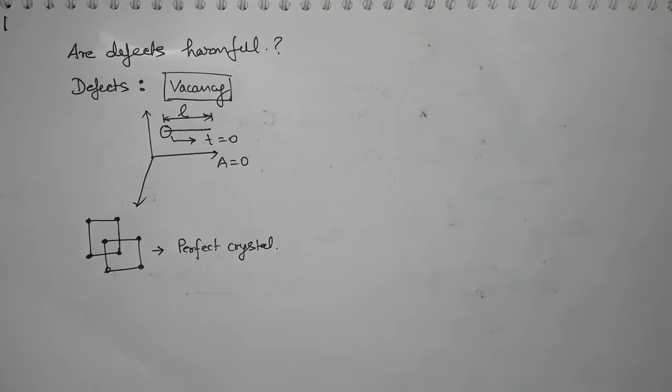So let's talk about vacancies. We know that vacancy is a defect, but it depends on our definition of defects. Our definition says that a crystal is perfect when all the sites where the atoms should be are taken by atoms. And when that happens, we call that a perfect crystal. But it is ironical, although all our understandings are based on such definitions, that a crystal is perfect when all atomic sites are taken by atoms.

But it doesn't happen in reality, never. We can never have a crystal system which has all the atoms on its sites. So we can never achieve any crystal which is perfect. Although according to the third law of thermodynamics, it should be available at absolute zero temperature, which also we cannot achieve. So maybe instead of calling something perfect, we could call it absolute, because absolute things don't exist in reality, they are unattainable.

So you can change your definition of perfect, and you can imagine that only when at least one of the atomic sites is absent of its atom is the crystal perfect. Then we will see almost all the crystalline materials in their perfect form, in their natural form. But it is just so that our definition of perfect does not match with what is naturally existing.

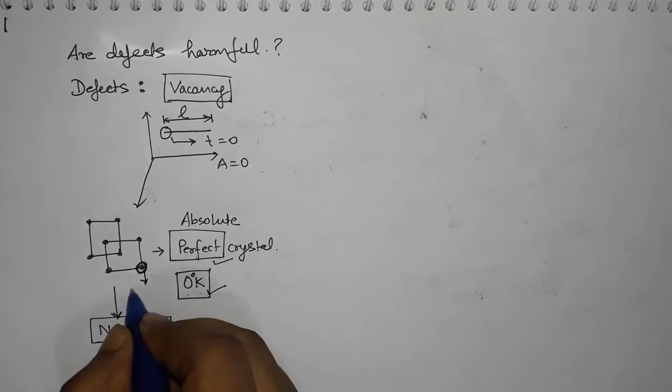So whatever we see in nature, we say that those things are not perfect, and that something absolute, something perfect, something heavenly can exist at some absolute temperature, pressure, scenario, or place. But by nature, it is important for a defect to be present, and therefore defect, although it sounds a negative term, sometimes provides a lot of the things that are there in the universe of materials. So we will talk about one particular type of defect today, and there is a reason why we need that.

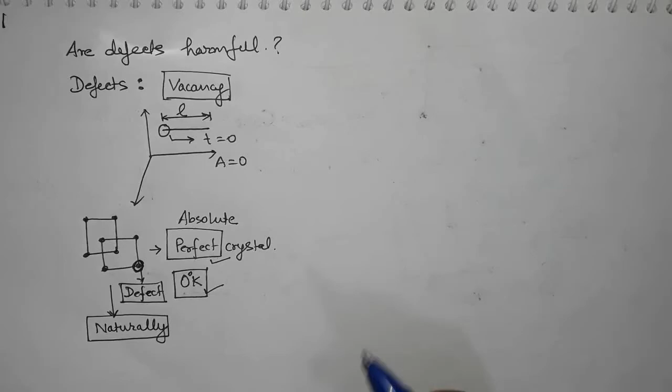So let us imagine that we have a perfect crystal and all the atomic sites have atoms sitting in their equilibrium position. Okay, so we have atoms like this, and then we have another atom layer, maybe like this. This appears to be a plane of atoms, and this interplanar distance we can call A, and the interatomic distance we can call B.

Okay, and now, if this is the situation that we don't have any defect and we are trying to deform this material, and this is my x direction, so this is x1, this is x2, and along this I'm trying to apply a stress, and this stress will vary because of the presence of atomic sites, right? And so let us say that our strength, which in this case we are calling cohesive stress or

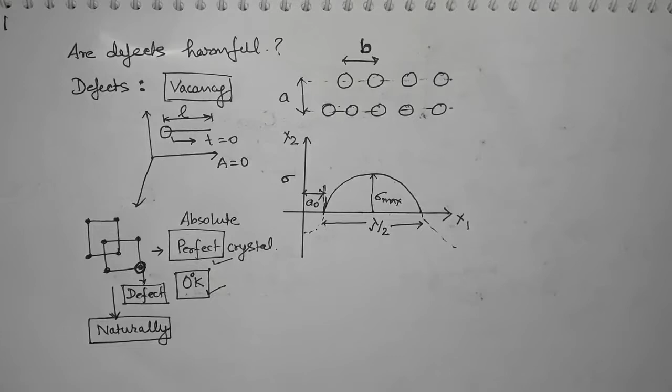Okay, and so we can say that our stress here follows a sine curve equation, which can be given by the amplitude multiplied by the sine of the angle, and that angle at any point can be given by 2 pi by lambda into x, right?

Because the whole wavelength covered in 2 pi will be lambda, so any unit distance will be 2 pi by lambda, and the unit dimension along x1 direction, so no displacement is happening in the x2 direction. That is our assumption, so we can just call it 2 pi x by lambda instead of calling it 2 pi x1 by lambda. So this is

how the stress changes. And if we imagine the angle to be very, very small, then we can take sine of theta equal to theta, so we can say sigma max 2 pi x by lambda, right? And now we can say that stress is actually following Hooke's law, because we are talking about elastic deformation. So this should be elastic modulus into strain, and strain in this case is actually x by A naught.

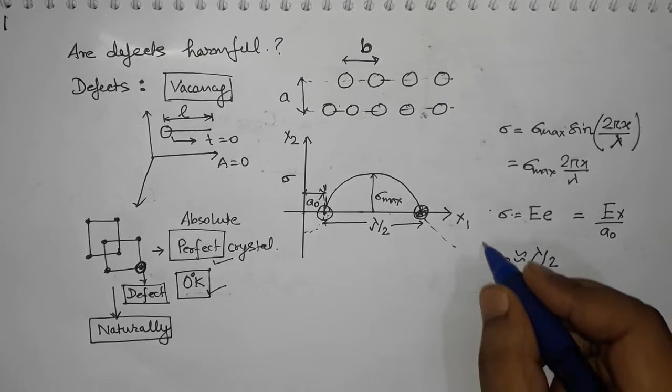So we can assume that A naught is equal to lambda by 2, and this is our assumption. And this assumption is not very wrong, because we are talking about dimensions of very short lengths. So we are not making much mistake here. So now we can replace A naught with lambda by 2, and then we can plug everything back in the original equation, and we can say that sigma

should be replaced by Ex by A naught is equal to sigma max and 2 pi x by lambda, and lambda is 2A naught, so we can replace lambda by 2A naught, right? So then A naught gets cancelled, x is cancelled. So what do we get? We get sigma max is equal to pi by E, right? So this is what we get.

And now, this is the maximum value the stress can attain if we want to deform the atoms elastically, and we imagine that it is a perfect crystal, there is no defect. So how much strength is required to have this much amount of strain? So this is the maximum value of stress it can go to.

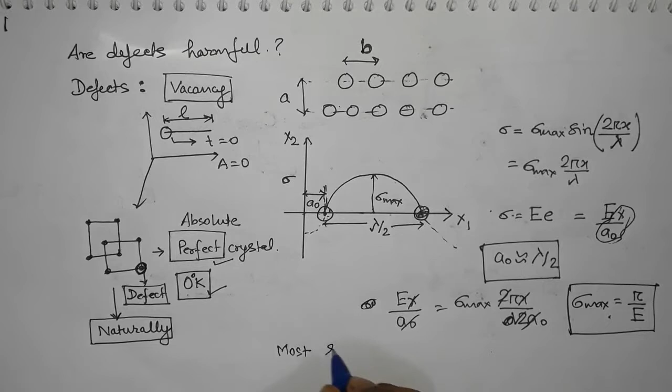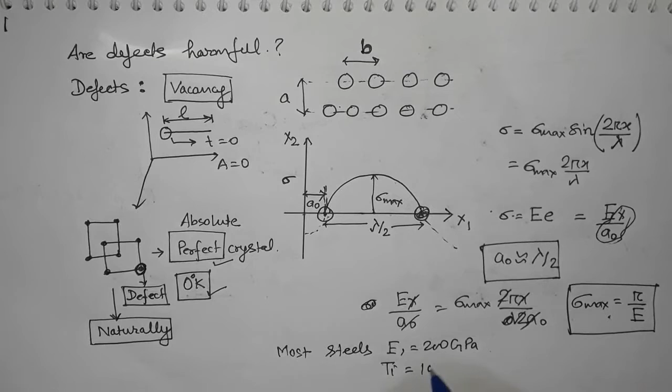And for most of the materials, especially let's say steel, the elastic modulus is in the range of 200 gigapascal. For titanium alloys, it is in the range of 100 gigapascal. For aluminum, it is close to 70 gigapascal. Okay, so there can be a change of 1 or 2, which will make it 201 gigapascal, 202, 205, sometimes 210. So in this range steel falls, in this range titanium, and in this range aluminum and their alloys.

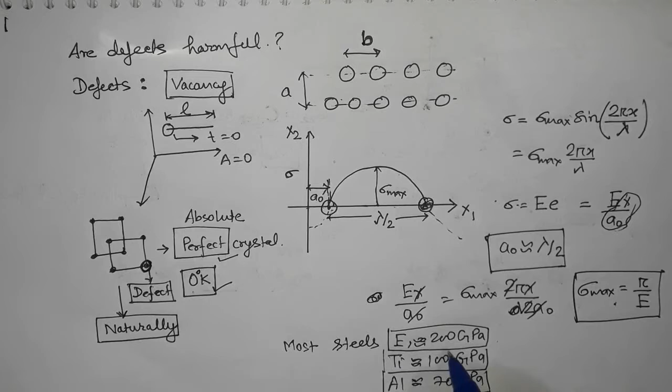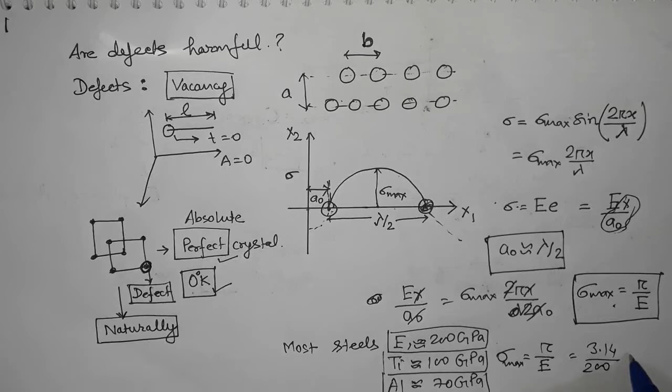So let us put 200, which is the highest. So if you put 200, then how much should be the strength you will be getting? So this will be 3.14 divided by 200 gigapascal, right? Oh, there is a mistake here, because dimensionally it is not correct. So sigma max should be E by pi. So this will be 200 by pi.

So this will be 200 by 3.14. And so let's take that to be 3. So how much should that be? It should be 66 point something, right? So 66 point something, 66.7. So we get 66.7

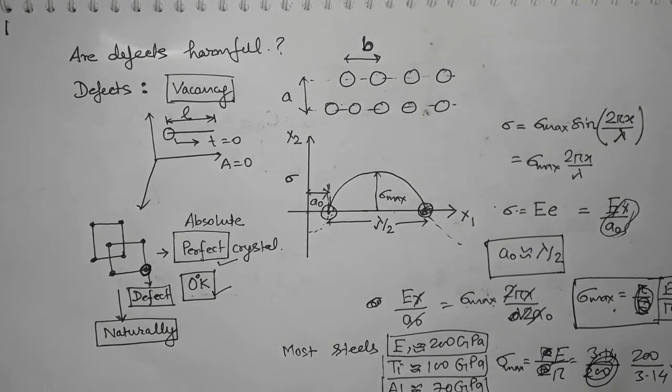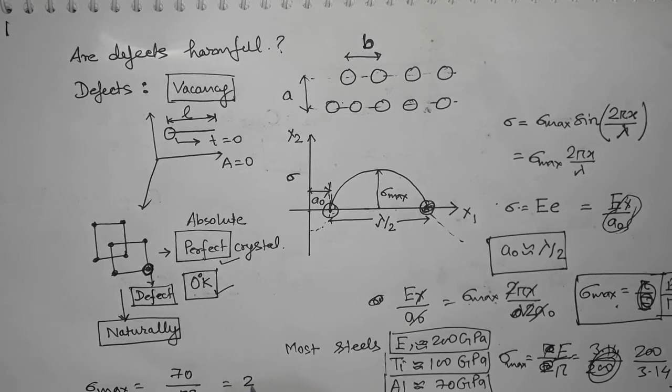gigapascals of strength. But maybe many of you know, or maybe not, this is a very high value. You don't actually need this much amount of stress to break steels. You need much lower than that. So if you take the very smallest value, 70 by pi, which we are rounding off to 3, will be 23.3 gigapascal, and this is also very high.

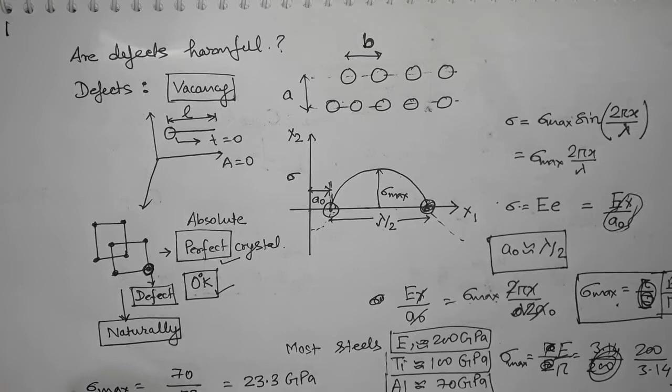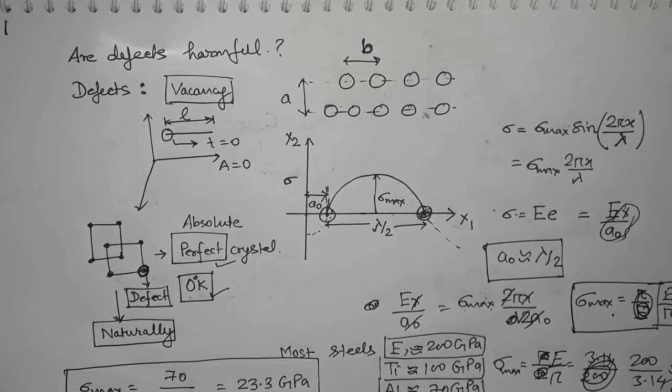So the question is, what is wrong? If we calculate the stress to be in gigapascals, we actually don't see any material even close to 1 gigapascal. The closest you can get is maraging steel. For maraging steel, you need a very high amount of stress, maybe close to 1 gigapascal to break it, but no other material can go to this much strength.

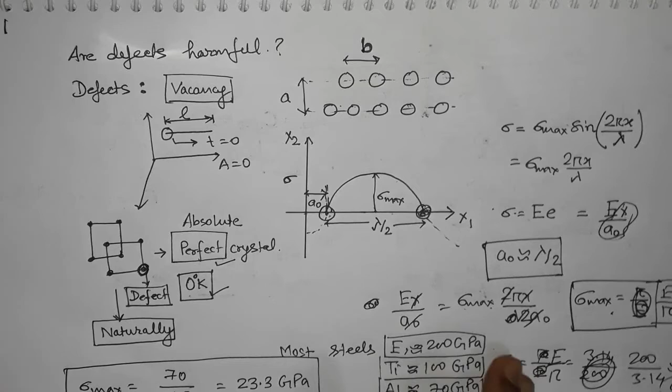So then what is wrong in our calculation? Forget about breaking. We are talking about deformation. And we need a much lower amount of stress in order to make deformation in steel. So what is wrong? And if there is something wrong here, then it is right to say that material is not deforming in this way. Okay, so let us discuss this in the next page.

So now we know that materials deform at a very low stress in comparison to what we calculated, which is called the theoretical strength of material, or the theoretical cohesive strength of material, and that comes out to be E by pi. Okay,

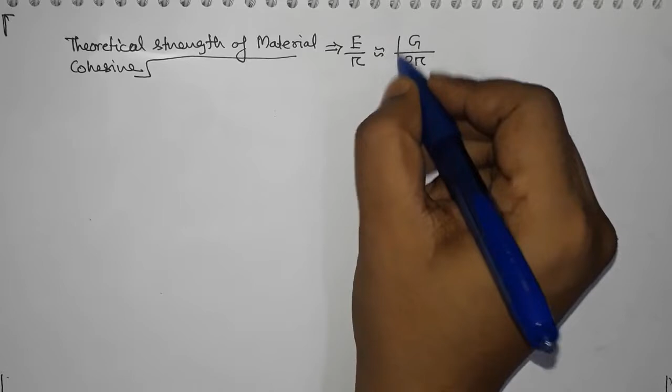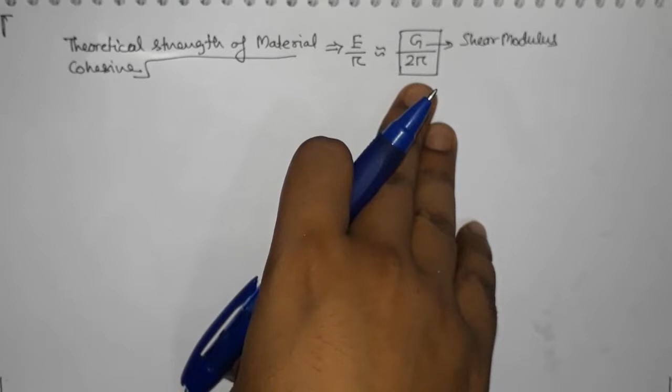so E you can relate to G by 2 into 1 plus mu, and mu is not very large, so you can just ignore it. So this could be G by 2 pi, where G is the shear modulus. Okay, so now we know that this is not true. We never attain this much amount of strength, so there is something wrong.

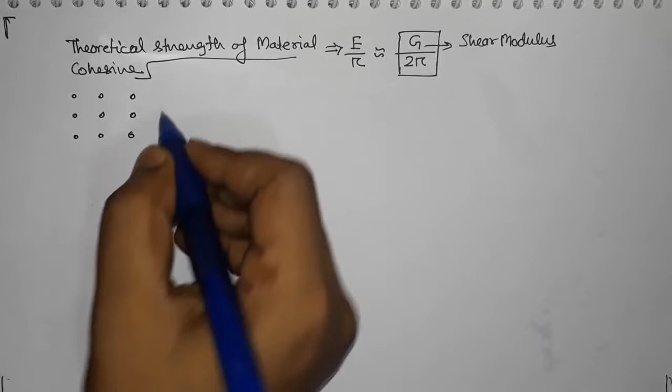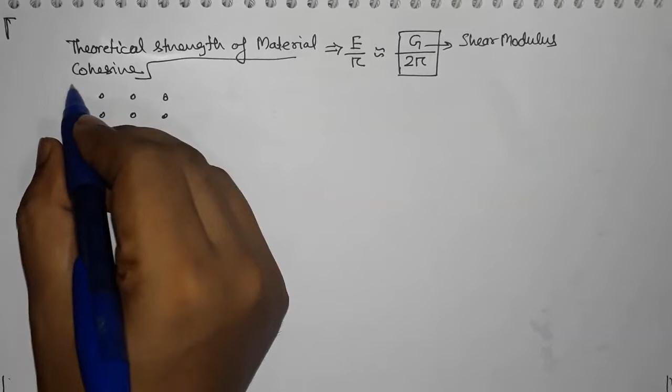The mistake we are making in this theory is that in order to have one atomic distance of deformation, so let's say that this is how our atoms are arranged. Okay, and we are applying a shear stress like this, and a shear stress of the same amount in that direction. Now you increase the shear stress in this direction, then it should deform. Or you fix this direction and just apply shear stress in this direction, then it should deform, right?

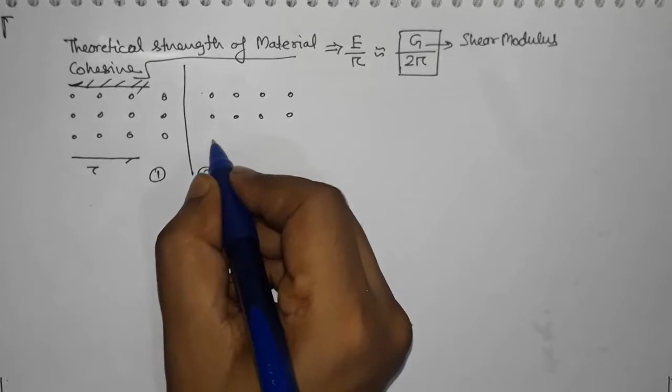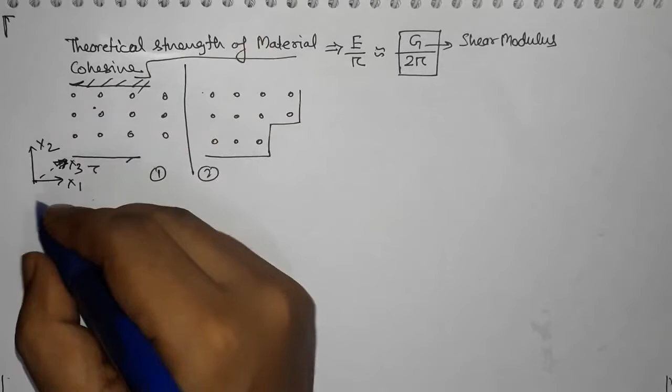And now we are saying with this theory that, so this is figure 1, and in figure 2 we are trying to say that the displacement or deformation which is happening in our material is of one atomic distance. So it's like this, and this is x1, this is x2, and then you have x3 direction like that. So you have atoms along x3 directions also. So you have something like this

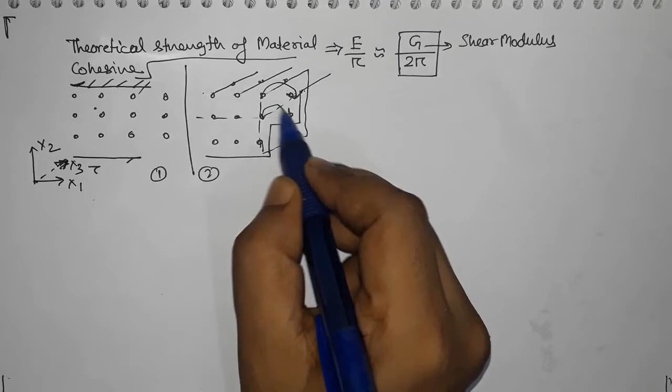in 3 dimension, and what we are saying here is that this whole plane of atoms along this line has moved in one instance. So if there are 100 atoms on this plane, all those 100 atoms have moved to this position. This atom has moved here, this atom in x3 direction has moved here, and so on. And this assumption is wrong because it requires a coordinated movement of atoms along the whole plane,

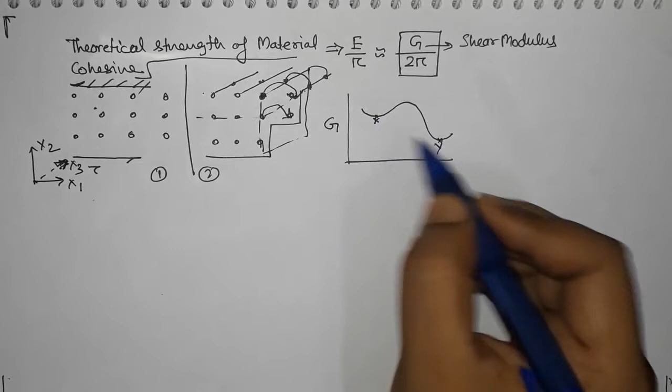and that requires a lot of energy, because the energy barrier for this atom to go there will be of some value. So let us say there is a stable position here and a stable position here, and this is the free energy. In order to go from site 1 to site 2, the atom requires some amount of energy, which is a barrier.

It will not just go there, because it will have to increase its energy and then go there, and this is called the energy barrier. This energy barrier for one atom is something, and for n number of atoms it will be multiplied by n, which is a huge amount, and because of that we get a very, very high value of stress required for this movement. So it appears that material is actually not deforming in one go, right?

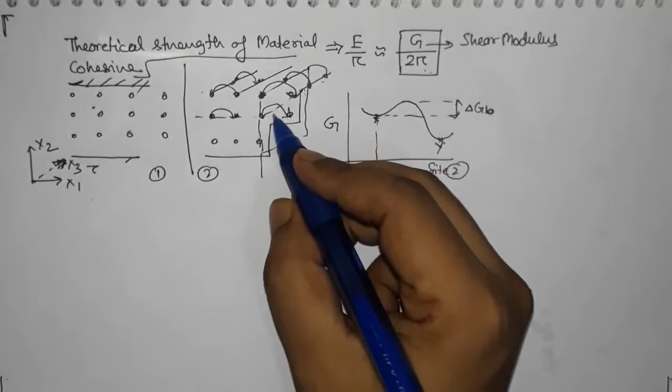Not only that, we are also saying that not only this atom has moved, but this one, and this one, and this one. So we are saying that the whole slab of material has displaced itself in coordination with millions of atoms in one go, and that's not happening. So then what is happening? The theory which describes the phenomena in reality is based on the concept of dislocations, and that's the kind of defect we are trying to understand in this lecture.

What is explained by the theory of dislocation is that we have a defect in our system, and it is just there by nature. This defect can be described as a plane where atoms are missing. Again, this is x1 direction, this is x2 direction, and the direction going into the plane is our x3 direction. So we have a whole plane in x3 direction, and this plane is missing, right? And then when you apply stress, this plane has joined this plane.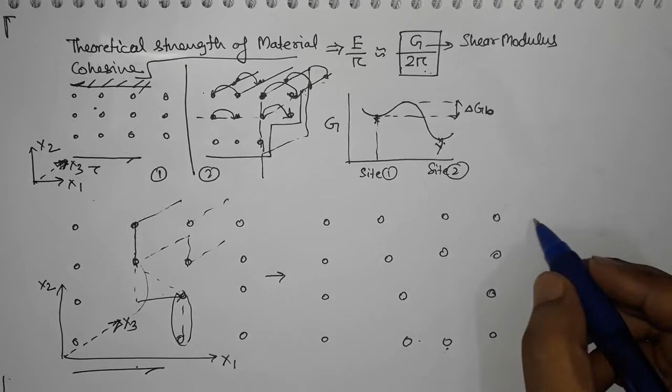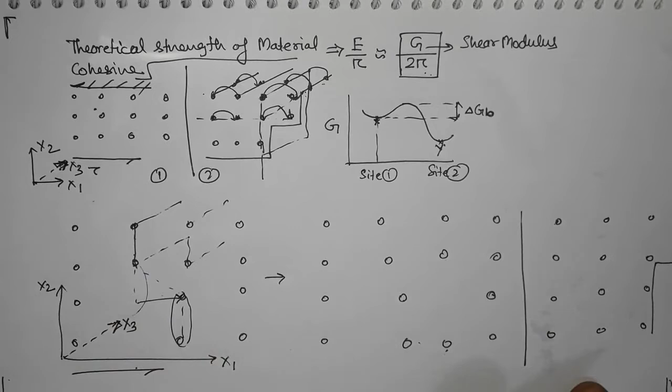So in the next step what will happen? This will happen. So now this will join this one, and so on the surface you will see a step. Okay, and this phenomenon of movement of such kind of dislocation, and many such steps together when you see, is called a slip band. Okay, many of these kind of steps together are called slip band.

So now let's pause for a while. What we learned in our last page was a mechanism of deformation in which atoms move piece by piece together, and instead of drawing those atoms, we can draw planes. So we can say this is the plane of atoms, and then there is a plane which is missing, and then there is a plane, and then there is a plane, like this. So this is how the material is, and the atoms are arranged at their interatomic distance.

Okay, so instead of drawing all the atoms, we can draw planes, and we can say that this plane is missing, right? This becomes a symbol of dislocation, this particular type of dislocation. So what is happening here is that this plane is joining this, and this part becomes the extra half plane. Then this extra half plane joins this one, and this one becomes extra half, and then at the end you see an extra half plane there which forms like a step.

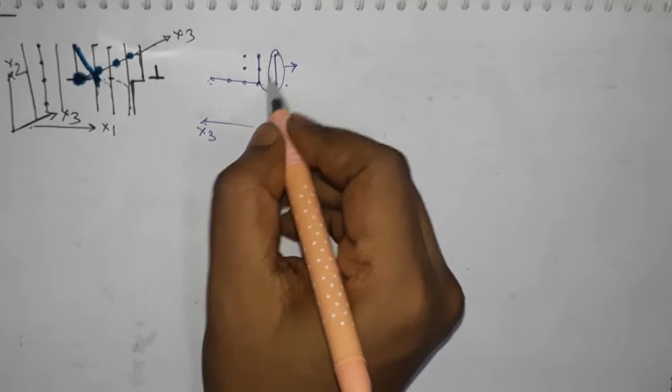Okay, so now let us try to see that. I hope I can make you understand by drawing this in a different way. Imagine that this is my half plane, with atoms along here, and this is my x3 direction now. When I say that this half plane will join this, so that this part becomes free, instead of all these four atoms joining this layer of atoms, it can happen in the next step.

Let me draw that part. It can happen that this half plane has joined that one, so I am making a little tilt here to present that, but in the next layer along the x3 direction, the half plane actually lies here. So let's denote that here my x3 coordinate value is 0, here it is 1, and here it is 2, and so on. So one atomic site has a unit of 1.

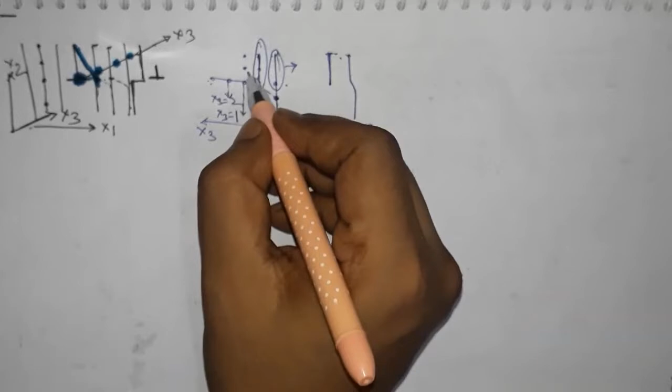What I'm saying here is that at x3 equal to 0, the half plane has moved. At x3 equal to 1, the half plane has not moved. At x3 equal to 2, also not moved; it has happened only on the first layer of atoms. Slowly it will happen to the second layer, then the third layer, then the fourth layer, and so on. And the same phenomenon on the x1 x2 plane is also happening piecewise. So it is a piecewise phenomenon.

Not more than one atom is required to move in one go, and therefore this phenomenon needs a much lesser amount of energy in comparison to the theoretical strength, and this explains why material can deform at a very low value of stress. So this phenomenon is called slipping.

And it is called slipping because it looks like one layer of atoms is just slipping on another layer. It looks like this. It looks like the upper part, which is 1, has actually slipped in the right hand direction, and that's why it is called slipping.

Okay. Now what is important here is that in this mechanism, the displacement which happens on the atomic level is always one atomic distance, at least. Okay, at least it has to be one atomic distance. It cannot be less than one atomic distance because that is not possible thermodynamically, right?

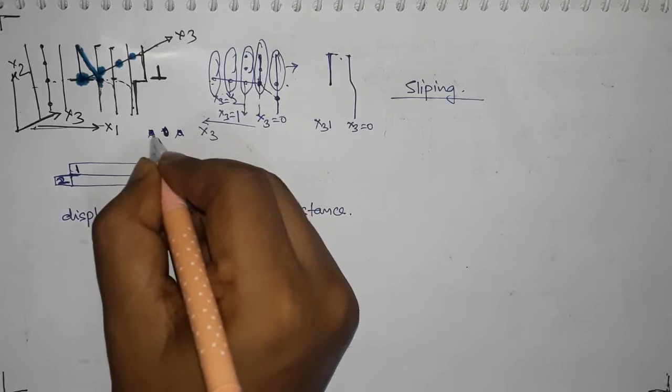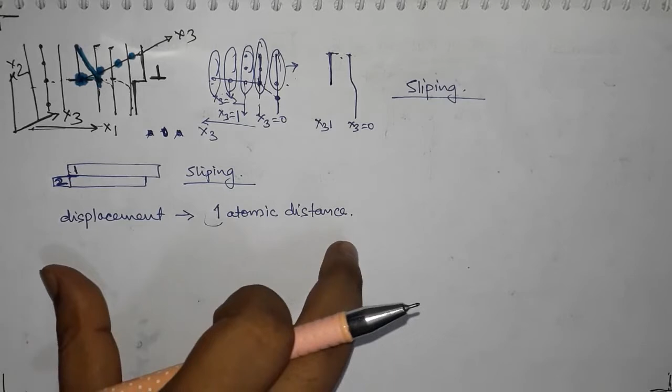An atom cannot move by a fraction of the distance. So this atom cannot move in between. So if two atoms are sitting at their equilibrium position, a position here is not available for either of these two atoms. Okay, so it has to move at least by one atomic distance, and there is a geometrical description of this thing.

Okay, so now let us take again this drawing of dislocation moving, and we will try to take a path around atoms and see what is happening. And in this diagram I will have to draw atoms again. So let me first make the atoms and then we will say what is happening.

Okay, so you can see where the dislocation is, where the half plane is. Let's not talk about dislocation because it might be confusing for many of you. We have also not yet explained what a dislocation is. So we will stick to the half plane, a missing plane and an extra plane kind of explanation. So this is the extra half plane, right? And it has atoms also in the x3 direction, and for the x3 direction I am not drawing anything else. So just imagine that this is how it is.

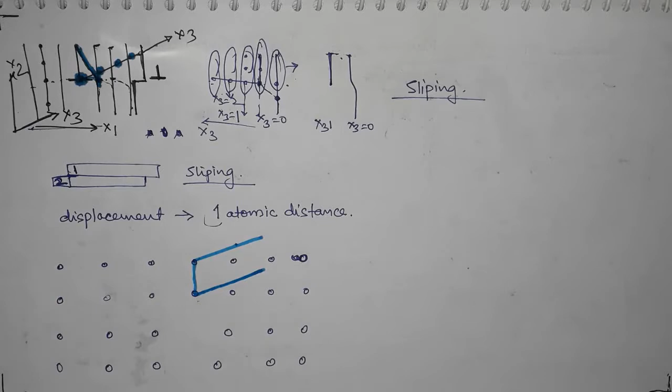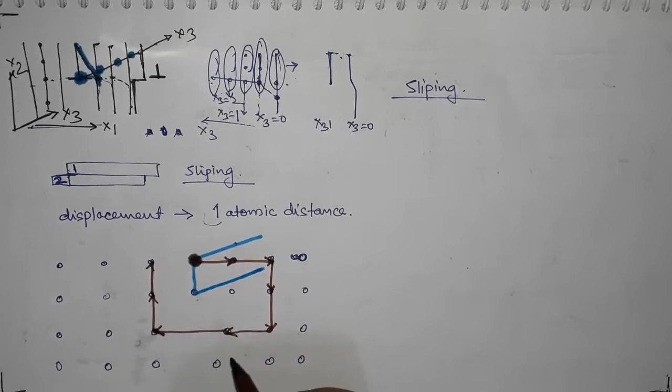And now we will take a path which goes an equal number of atomic distances in each direction, and I want to start from any position and come back to the same position, because that should happen in a perfect crystal. So I start from here, then I go 2 atomic distances: 1 here and 2 here. Then I have to go the same distance there: 1 here, 2 here, then 1 here, 2 here, then 1 here, 2 here, and now I'm not at the same position. In a perfect crystal I will always come back to the same position, but in this case it is not possible.

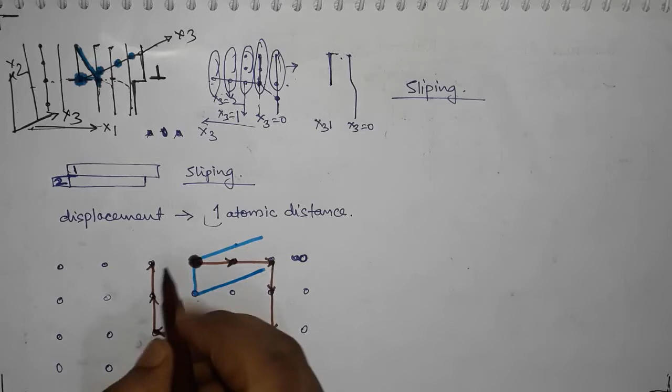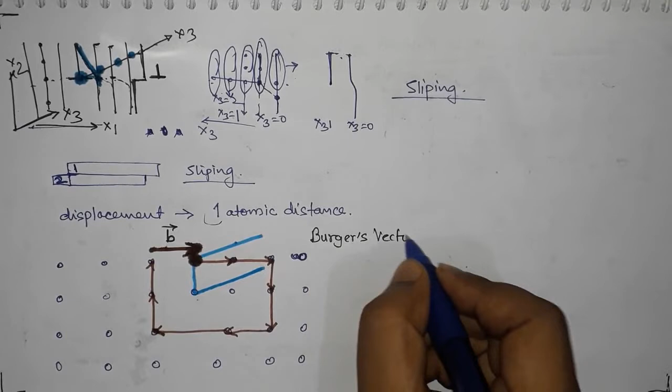And so the missing distance is one atomic distance. It is the amount by which this half plane has moved, and this amount and direction is called the Burgers vector, denoted by b. Okay, so this is a vector and the name is Burgers vector. And so the magnitude of the Burgers vector here is 1, and the direction is the direction of the movement of this half plane.

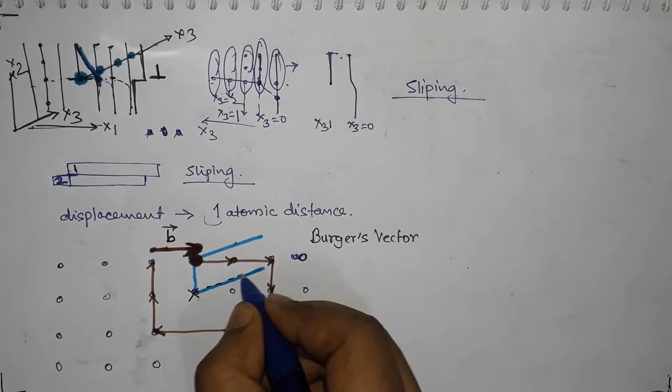But where is the dislocation, and what is a dislocation? So dislocation is this line. This line is called the dislocation, and it starts from here and it will end when the atomic structure ends. And in a real material, where does the atomic structure end? Either at the surface or at the grain boundary.

I'm not sure if you are aware of what a grain boundary is, but a grain boundary is kind of a border, you can imagine: in a crystalline structure you have certain areas which have orientation along a certain direction. So it is similar to a change in coordinate system. We'll come back to grain boundaries in more detail. But because atoms are sitting in a crystalline structure everywhere, this arrangement breaks only at the surface or at the grain boundary.

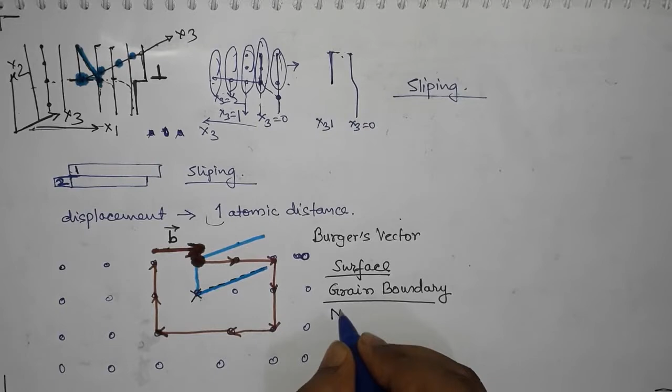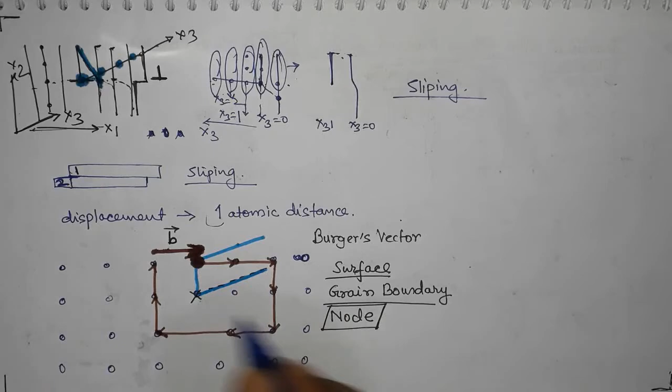Or at a node, and we will talk about nodes in a while. Okay, so a dislocation cannot end inside a grain. That cannot happen because it's a geometrical entity and it is there as long as the atomic arrangement follows the same arrangement.

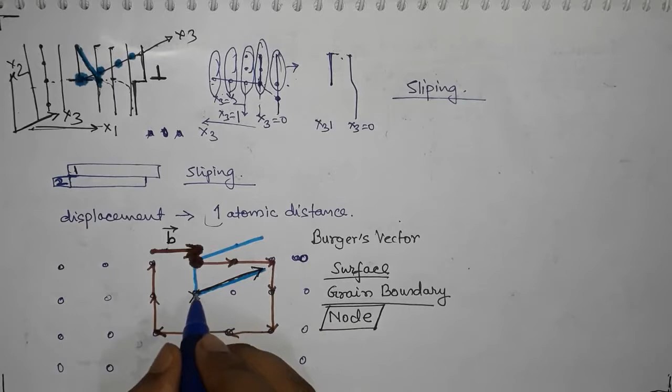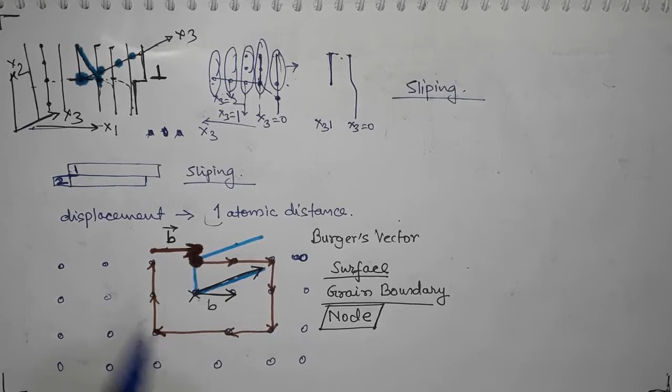Okay, so I hope it is clear to you that this is the dislocation line, and the dislocation line is along the x3 direction, and the Burgers vector is along this direction. And when this happens, it's like if I keep this pen like this and this whole pen is moving in this direction. So this whole line is moving. I hope you can imagine how that is happening. So this type of dislocation, where the line is perpendicular to the Burgers vector, is called an edge dislocation.

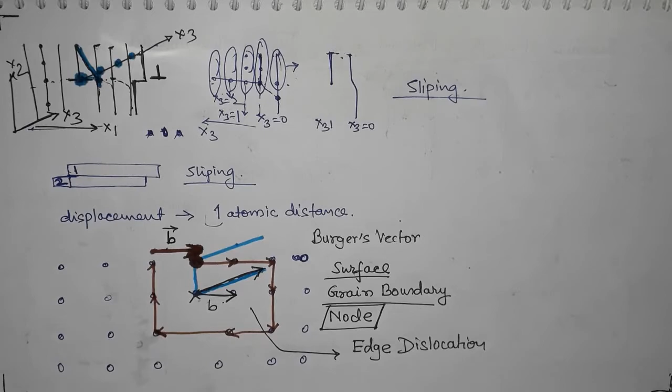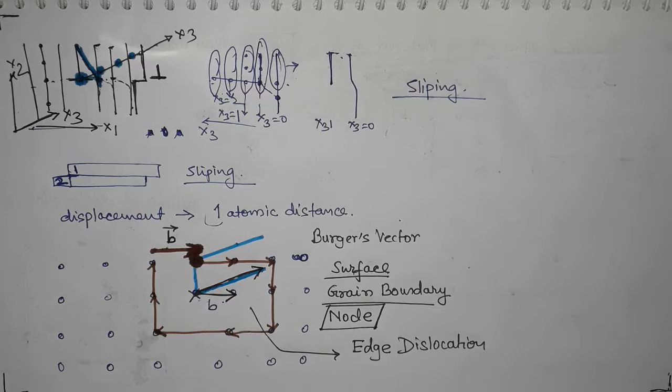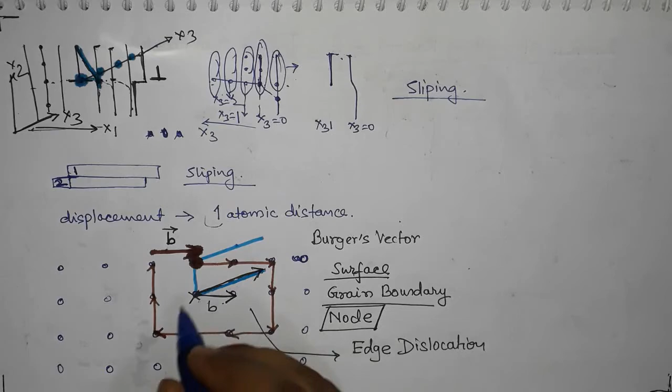Dislocation, as the name suggests, is a dislocation in the crystal structure. Okay, things have dislocated from their place. That's what happens here. When it reaches the surface, you see a step, and that's a dislocation. This is an edge dislocation because it has an edge here and it makes an edge again at the end. And this type of edge dislocation is represented by this symbol.

So this will be the case when I have an extra half plane above. I can have another situation when I have an extra half plane down. These two edge dislocations are said to have different poles, or different signs. So if you call this one positive, you call this one negative dislocation.

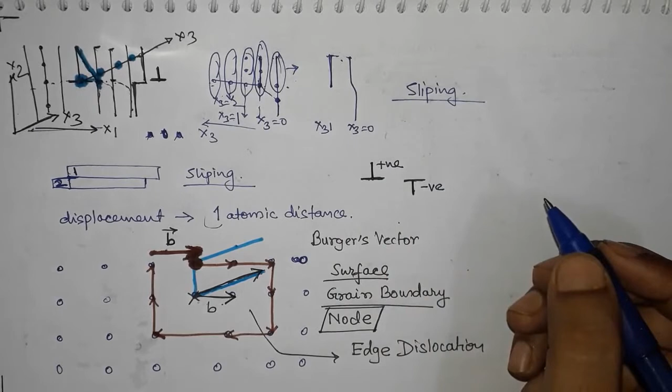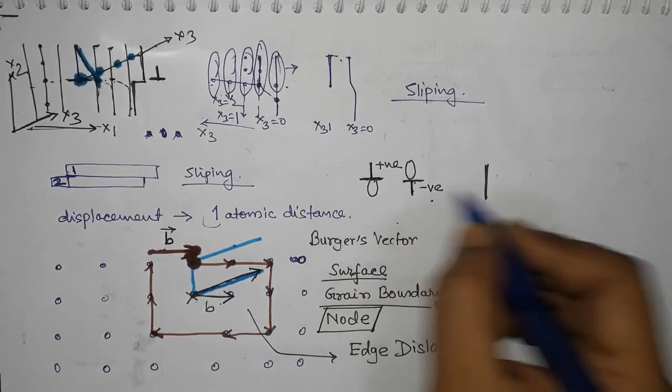And there is an importance to this because now you can imagine that this is a half plane on the upper side, and if you have an extra half plane on the lower side also, when they meet, what will happen? It will just be a perfect plane, right? Because here a half plane is missing, there a half plane is missing, and you just add these two and there will be no dislocation at all. It will be a perfect crystal. So this plus this will result in no dislocation. The dislocation will just vanish.

So this is an edge dislocation. This is a positive edge dislocation, this is a negative edge dislocation. This is how we define it. And then there are differences also, because you have an extra half plane of atoms here and that ends here. Below this you don't have anything. So this atom, because it is present here, will try to move these atoms away. However, the atoms in this area do not feel a need for an extra plane because they don't have it. So because there is an atom there, they want to compress it.

So this dislocation end has a compressive field on this end, and the opposite will be true for the negative dislocation. So the stress field at the tip of the dislocation has opposite nature when they change the sign. So now you know that these two will have a certain kind of attraction towards each other, because they appear to decrease their energy by just vanishing the dislocation. And if you have two dislocations of the same sign, then you will have a repulsion.

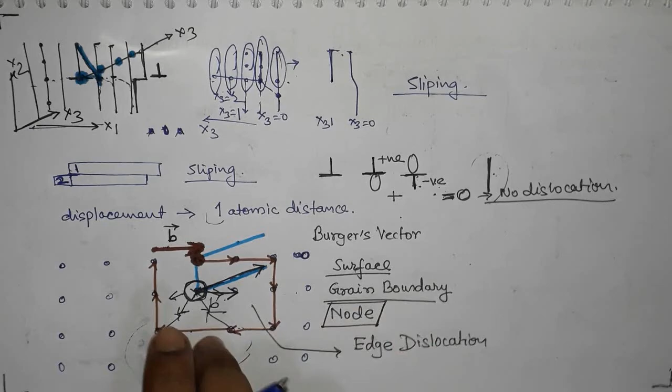This is like positive or negative charges, but this is happening because of the stress field. Because you have a compressive stress field here, if you have another compressive stress field, they cannot take care of each other. They will actually repel. They cannot exist at the same time. But if you have a compressive stress field and a tensile stress field, at least a part of their stress fields will cancel out, and because of that they will have a certain amount of attraction.

Can you also see something? This diagram is now too complicated, so let me draw that again, just the relevant part here. So you see this half plane is here and it is missing on the downside. Now can you try to visualize this? Suppose all of these are iron atoms, and then I put a chromium atom here.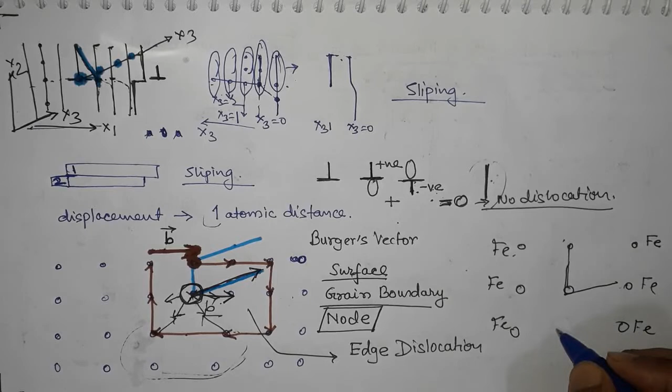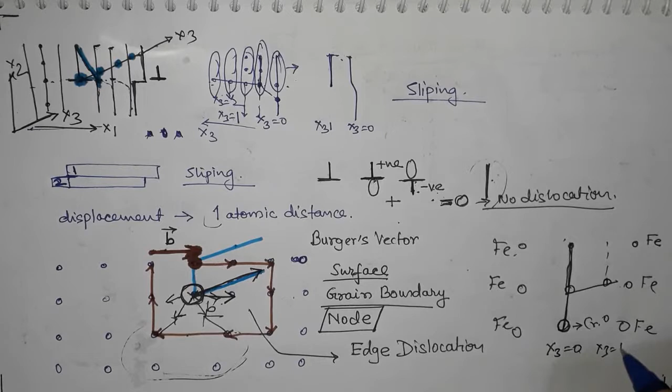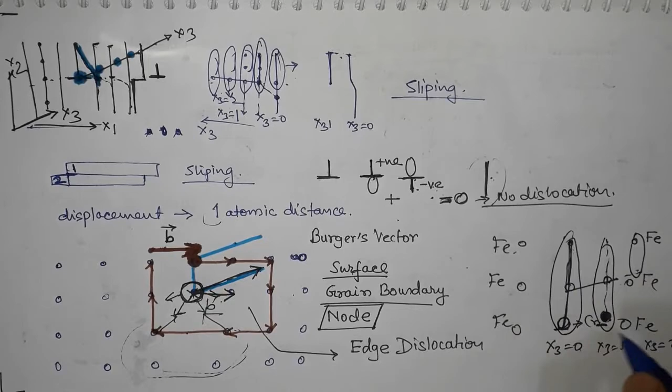So what will happen? This chromium atom will make this plane longer on the x3 = 0 coordinate. If I have another chromium atom at x3 = 1, then again this plane will extend till this point. But I have only two chromium atoms, so at x3 = 2 I don't have a chromium atom, so my half plane is only till there, but here my half plane is until here. And if you can imagine, the dislocation line which was initially like that has now become like this.

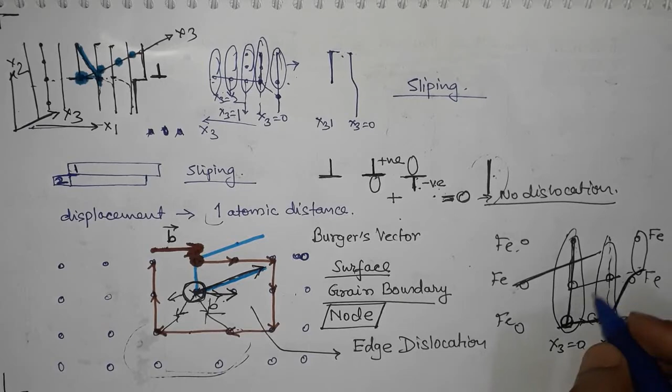We will talk about this phenomenon. This phenomenon blocks a dislocation, and we will see why. So this was an edge dislocation. Understanding edge dislocation was easier, but the other type of dislocation which exists, explaining and visualizing that is a little hard. But still, I will try to make you understand it, because this particular type of dislocation is a little different from the other type, which is edge dislocation.

So what is happening here is, I hope it is clear, but it may not be so clear to you. Actually it's like this. This has a step in the x3 direction, so along this direction. So it's like a tearing action. The edge dislocation can be shown by slipping of two slabs, right?

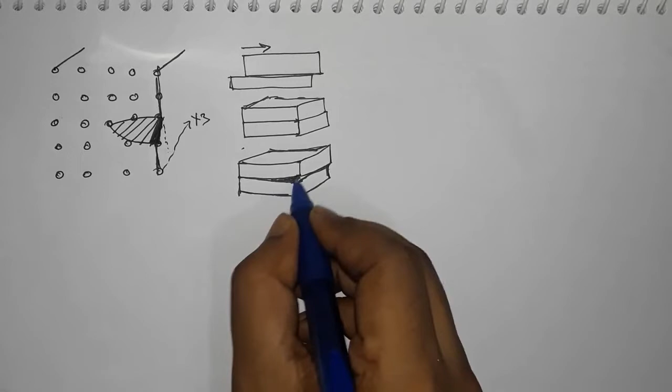So if this happens, this slab slips in this direction, so this is like an edge dislocation movement. Okay, but if you have two slabs initially like this, but then because of the stress, what has happened is the downward one has just a little bit of tear, you know, like a deck of cards you shuffle. So this is a different type of dislocation.

And in this case, the direction of the dislocation Burgers vector is in x3 direction, and the line of dislocation is also in x3 direction. It appears tilted here, but it is in the same direction. It's downward because I have a step there, but the dislocation line as well as the Burgers vector, along the direction where the atoms have displaced themselves, is in the same direction. So Burgers vector is parallel to the dislocation line, and this type of dislocation is called screw dislocation.

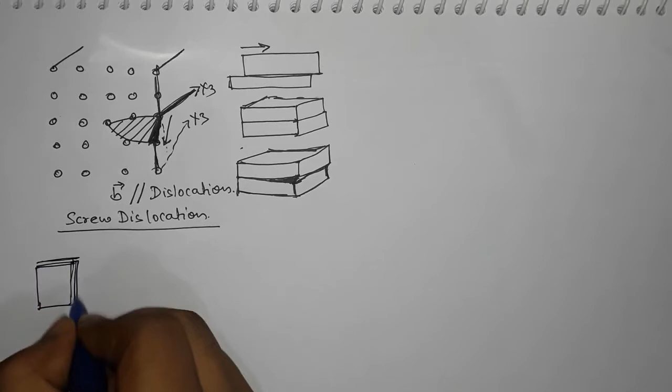And you can imagine this by taking a deck of cards and trying to expand the deck in your hand. All of them are like this, and when you expand them with your finger, they can look like this. The lower one is something like this, and then something like this, and each of these is the displacement which has happened in one atomic displacement, and that's how the screw dislocation moves.

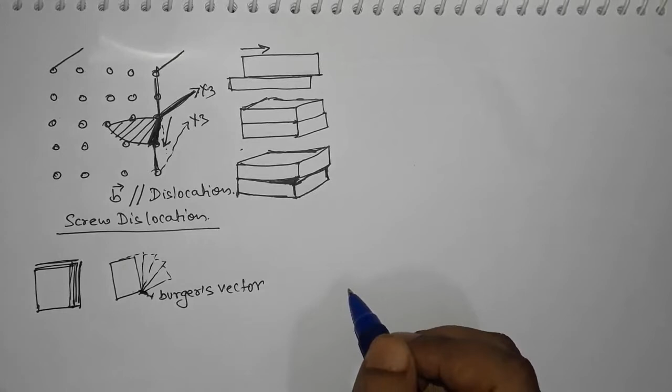So the dislocation line and the Burgers vector, it is actually moving perpendicular to this paper, and it is going downward, so it's like a helix which will go down into the plane of the paper. So that is the direction of the Burgers vector. And this is the line of dislocation, which are parallel to each other, and so it is a screw dislocation. So these are the two types of dislocations which we have in the material.

And dislocation you can also imagine as a layer flowing. Like a laminar flow of liquid, you see the upper layer moving with a boundary, like water on the ground flowing. If you imagine a laminar flow, each layer may be flowing at a different velocity because each layer will have different friction. This is layer 1, this is layer 2 of water, or wax, a very viscous material. In viscous material one layer is ahead of the other, and the boundary by which layer 2 has moved ahead of layer 1 is the dislocation line.

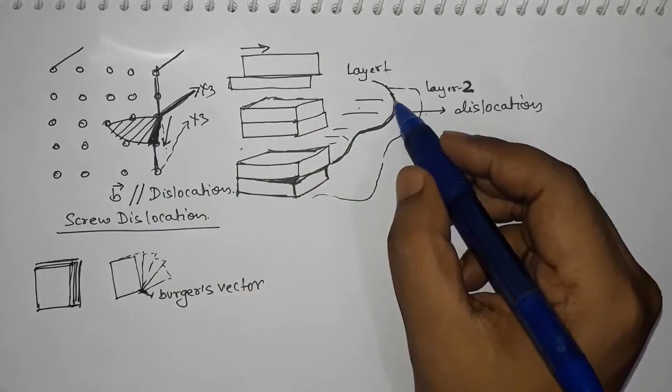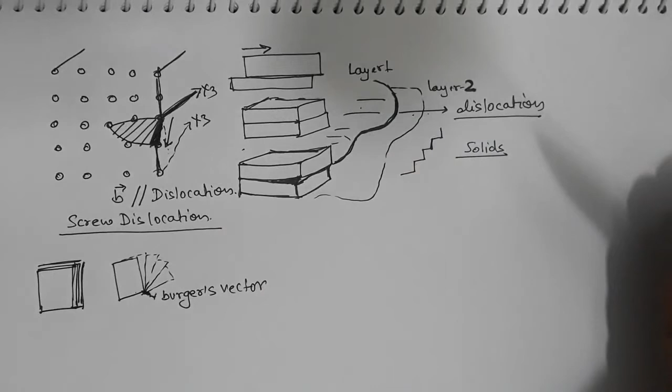And you can see this type of dislocation line when you see the material deforming in a microscope. You see that it is not actually very straightforward that you have only edge or screw dislocation here, because the boundary in the liquid does not look like this; you don't have steps like that. And in reality, dislocations are present in solids. It's a concept for solids, not for liquids, but you can imagine it as laminar flow of layers in a very, very viscous liquid.

So what I'm trying to say is that even in solids, when you see dislocations in a microscope, they don't look like straight lines, they look like this. So the dislocation in reality is rarely a pure edge or screw dislocation. It's actually a combination of the two, so that it looks curved. This is called a mixed dislocation. And one of the phenomena of this mixed dislocation is to move from one plane to another plane.

So in FCC crystals, the direction in which the dislocation moves, the Burgers vector direction, is usually the direction where the atoms are close to each other. So the atomically close-packed direction will be the direction in which it is easier for the dislocation to move, and in FCC that direction is <110>, because in FCC you have atoms closer on the faces.

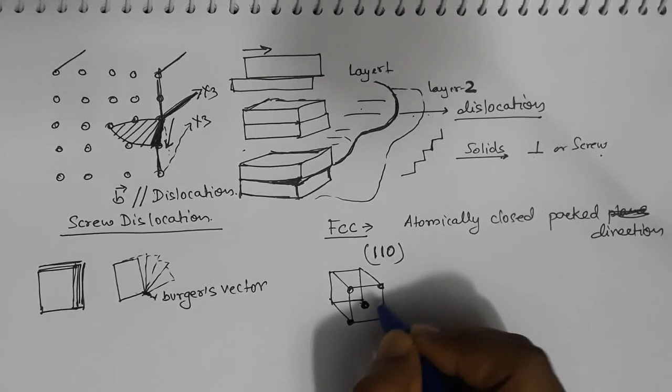So when you draw an FCC crystal, you have atoms on the faces here, here, and at all the corners. So if you take this plane, on that plane you also have an atom at the center of the face. So on the six faces of this cube, you have atoms sitting closer to each other in comparison to a plane like this.

Okay, so on this plane you don't have atoms; you have atoms only there and also here. But if the dislocation has to move there, this distance is longer than that distance on this face plane. So that face plane direction, which is 110, is the direction of slip, because the atoms are closer there, and the plane on which they slip is the 111 plane.

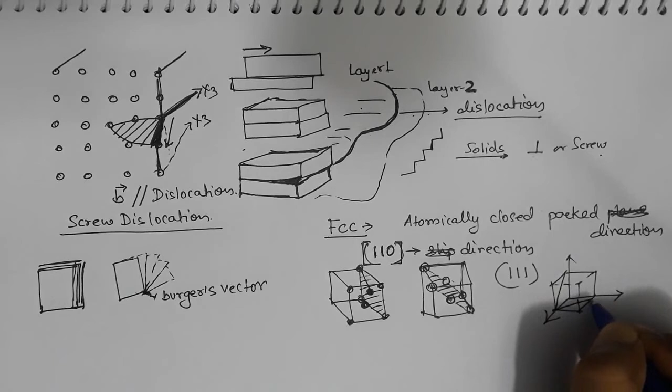So the 111 plane: if you take x1, x2, x3 like that, and then make a cube which looks like this, then the 111 plane will be this family of planes, and you will have many of that kind of plane in this cube. So 111 is the plane of slipping and 110 is the direction of slipping in FCC.

Right? So now we know in FCC it moves on the 111 plane and the direction is the 110 family. So it could be 1 bar 1 0, or 1 0 1, 1 0 1 bar. All those combinations of directions are possible, and all the possible combinations of planes are also possible, so 1 1 1, 1 1 bar 1, and so on. So the family of planes is 111 and the family of directions is 110 in FCC.

Now imagine that there are two 111 planes which are inclined in this way. So this is one type of 111 plane, and this is another plane which is 1 1 bar 1. They intersect, so this is a 111 plane, this is another of the 111 family. And the direction along which the edge dislocation can move is 1 bar 0 1. So that's the direction where it can move.

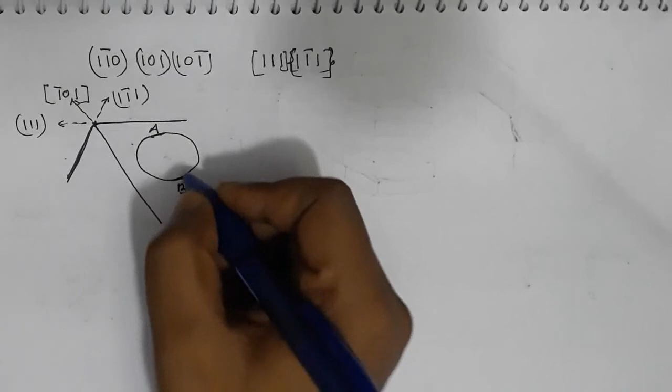Now you have a dislocation loop, and the dislocation loop is such that here and here, let's call them A and B, these two are pure edge dislocation parts. Here and here you have pure screw, and the rest are a mixture of edge and screw dislocation. This whole loop is moving, and after some time it may appear that the screw dislocation moves into another plane. Screw dislocation can move from one plane to another plane.

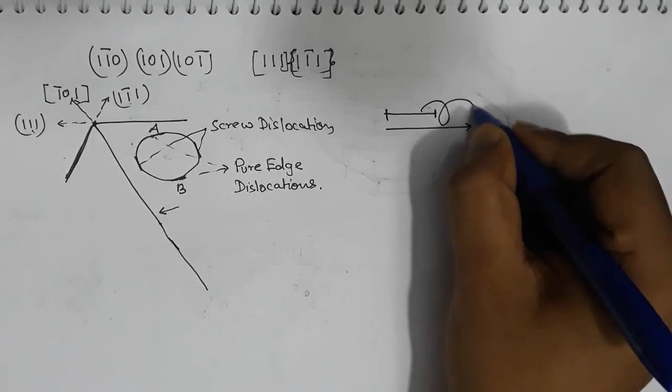So you have to understand this part. Let's say this is my screw dislocation, and this is the line of screw dislocation, and it is moving in this direction like a helix. So it doesn't require a plane to move. It is a line which is moving along the line, so it doesn't need a plane.

But for an edge dislocation, if this is the line, then the Burgers vector has to be perpendicular to it, and therefore edge dislocation needs a plane to move. If this is x1 and this is x2, then this edge dislocation can only move on the x1 x2 plane. So screw does not require a plane to move; edge requires a plane to move.

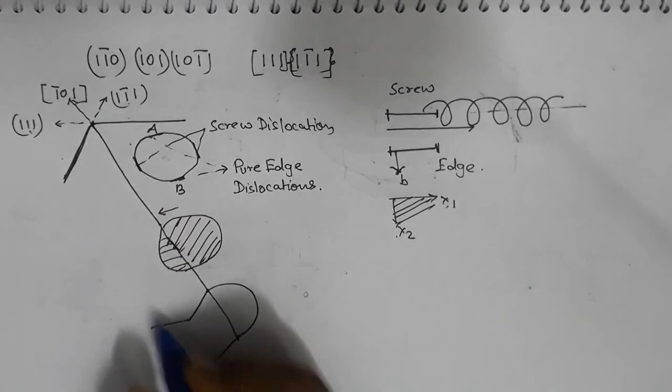So what happens here is that because a screw does not need a plane to move, it will just pass on to another plane. Then slowly the whole dislocation may look like this, it glides along this plane, and then it comes back to the same plane again, meaning a parallel plane with the same normal vector but at a certain distance. So this dislocation loop has actually moved like this, and after some time the whole loop will be on this plane.

So this dislocation loop would have crossed and come back to another parallel 111 plane. This phenomenon, when the whole dislocation loop moves here, is called double cross slip. And this part, when it moves from this plane to that plane, is called cross slip.

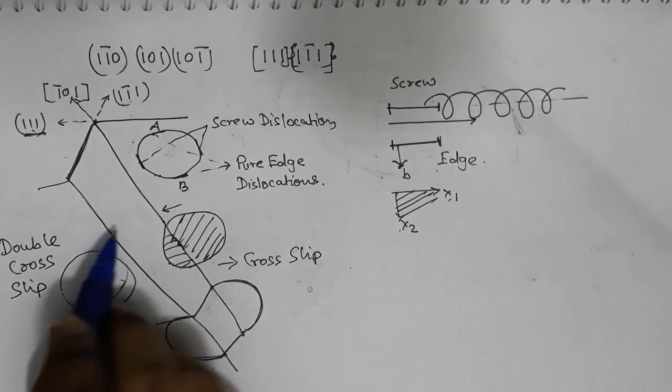I have tried to explain cross slip a little bit here, but the phenomenon is more complicated. The screw part of the dislocation needs no plane, so it can just go there, but the edge part of the dislocation will not be able to go. So there has to be something here so that the whole thing passes on, and this requires a little more explanation, which we will do later on.